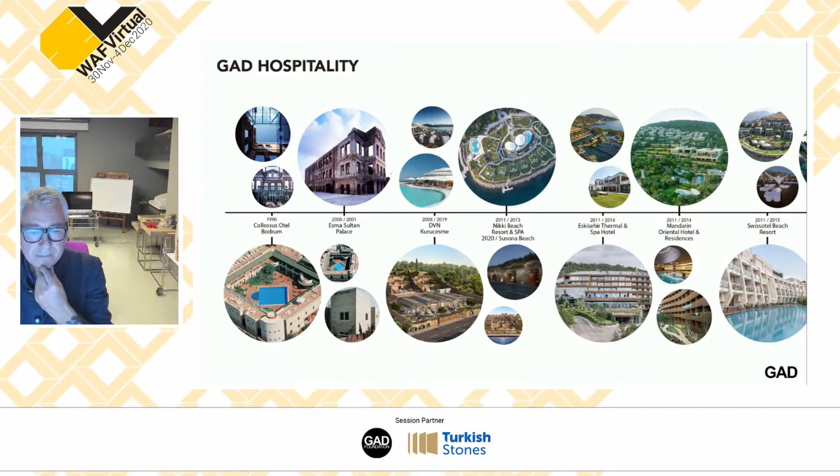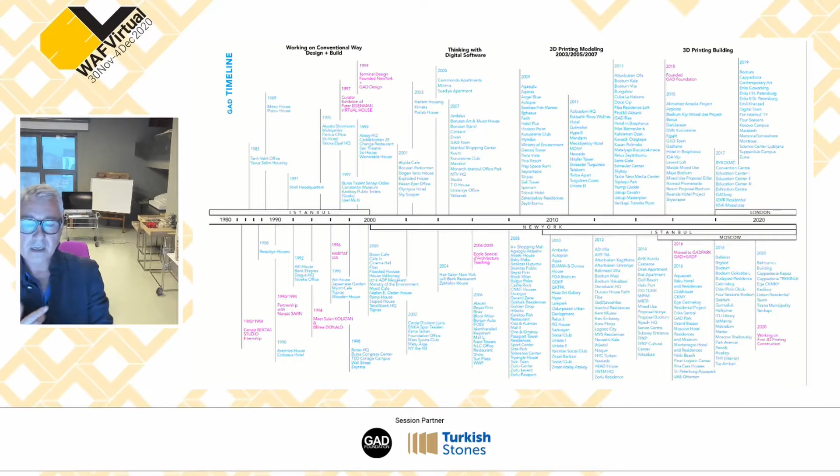I also like to work on architecture with stone, because stone is this fantastic 12,000-year-old material, and not only material, but also a statement tool for architects. What does that mean? It's a structural statement - you can do something structurally with that material. It's also a technical statement, and an art statement - what we need as architects to do something for our civilization.

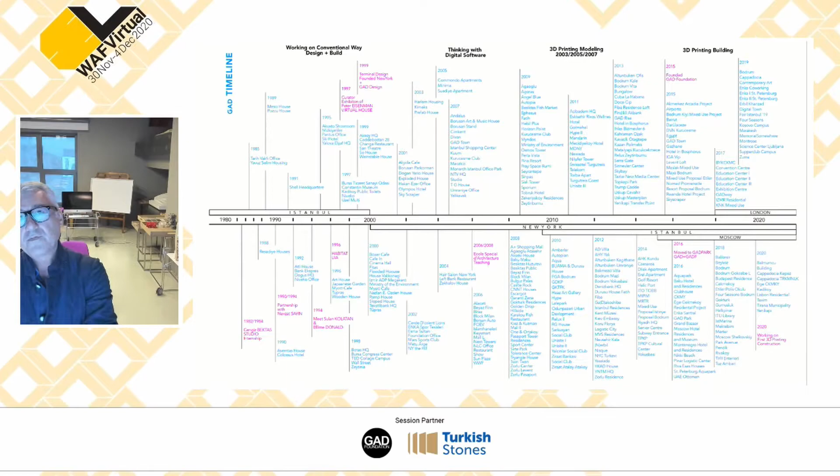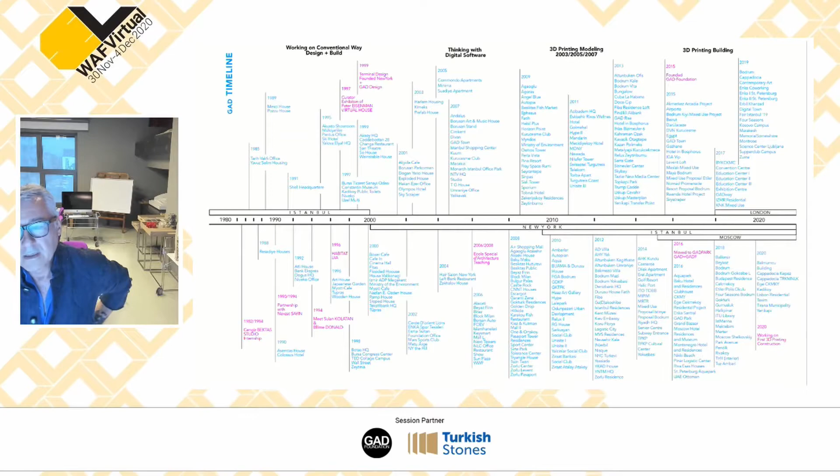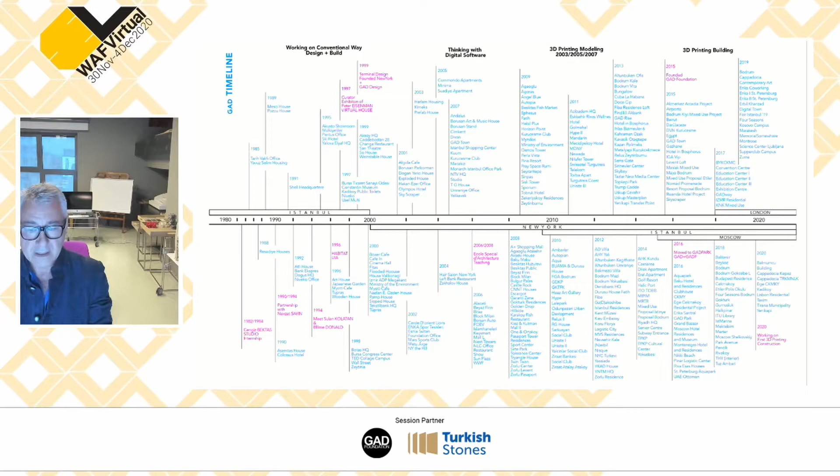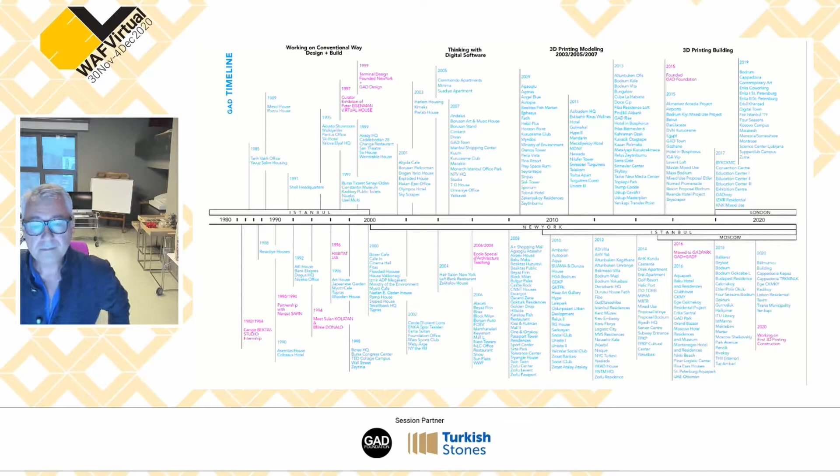I think this started when I was a small child, visiting with my family ancient heritage sites like Ephesus, Miletus, Priene, and Bergama - different kinds of places - and also Cappadocia. These really influenced me, and the desire to do something for people, for our civilization, or also to explain something to myself.

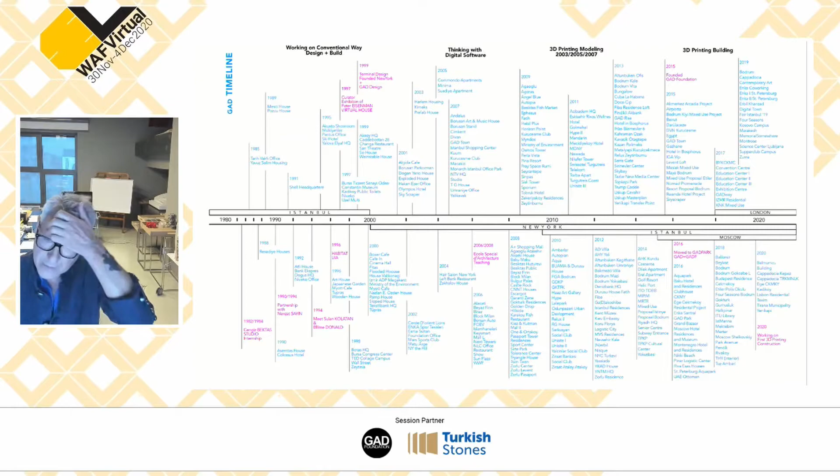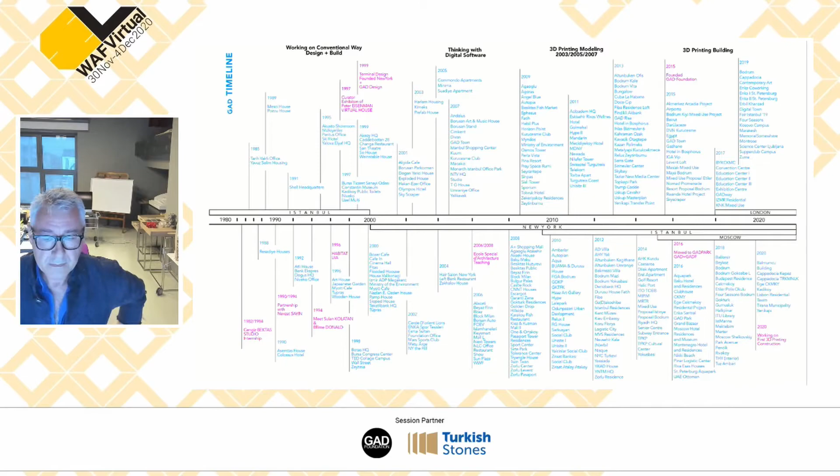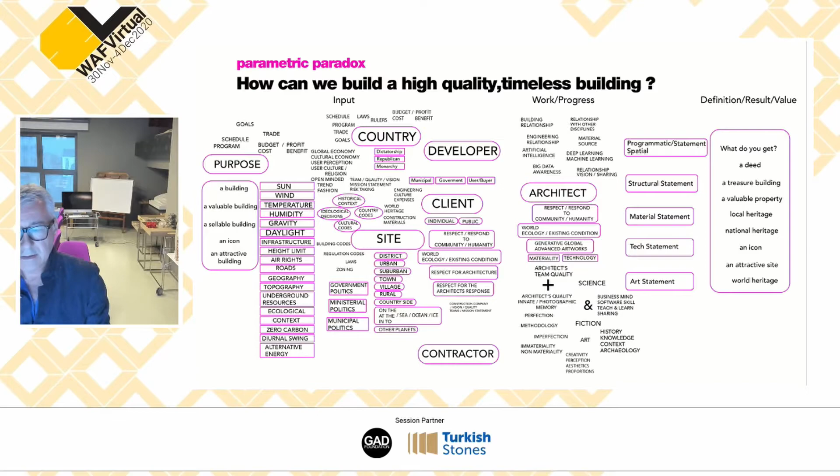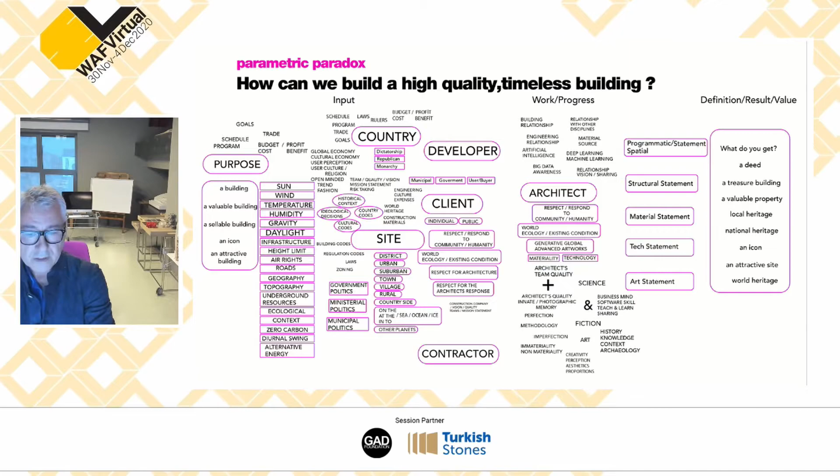So you can see designing something, building something, or adding something onto our planet is a very complicated issue. But in the end, as architects we would like to explain ourselves, our civilization, and our ideas through these kinds of statements. Stone helps you explain your civilization and your ideas to the next generation, because stone is normally 30-million-year-old material, not something produced yesterday or last week by machines - it's totally natural, and that gives you ideas.

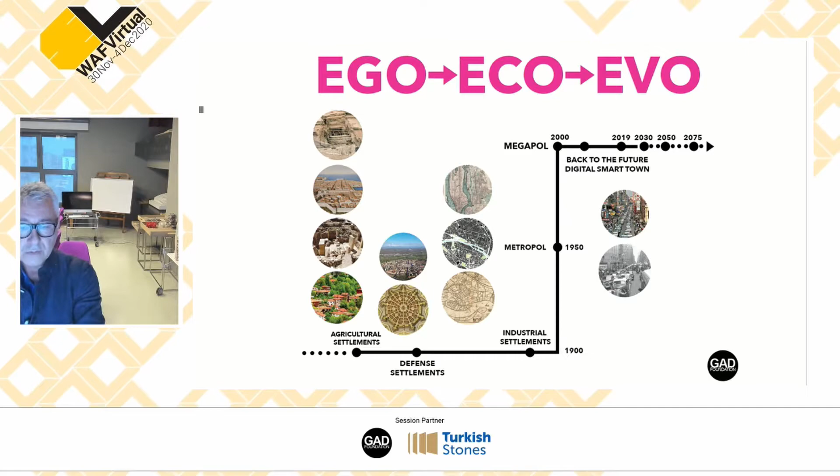Today we are interested in evolution - not just making statements about ego, not ecological things, but we are interested in evolution. I would like to show you some of our projects, what we do and what we did.

We are looking now, in this pandemic time, at what our future cities and dwellings will be.

The first project is in Ortaköy, Istanbul, in the middle of Ortaköy, surrounded by the Bosphorus, our city, and nature.

What we did was create an architecture, making a form and design - not only the building, but also giving back to nature what we add to our planet, as a big garden on top.

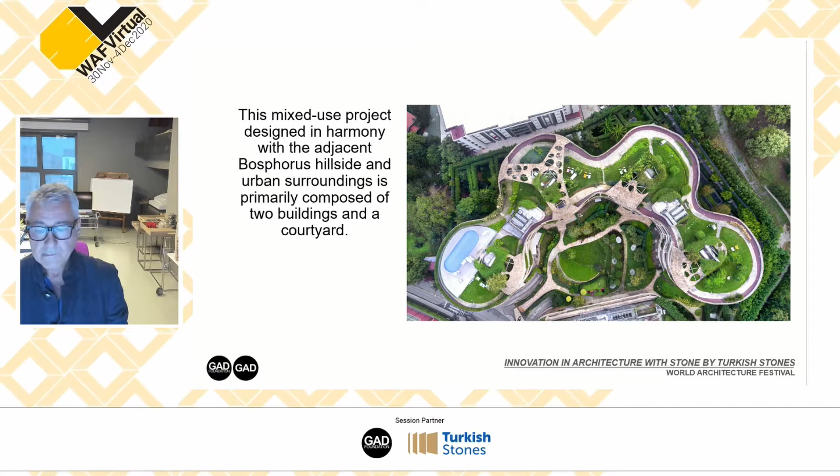We used Turkish stone as the material - Anatolian stone. I prefer Anatolian stone; the name is Ünye.

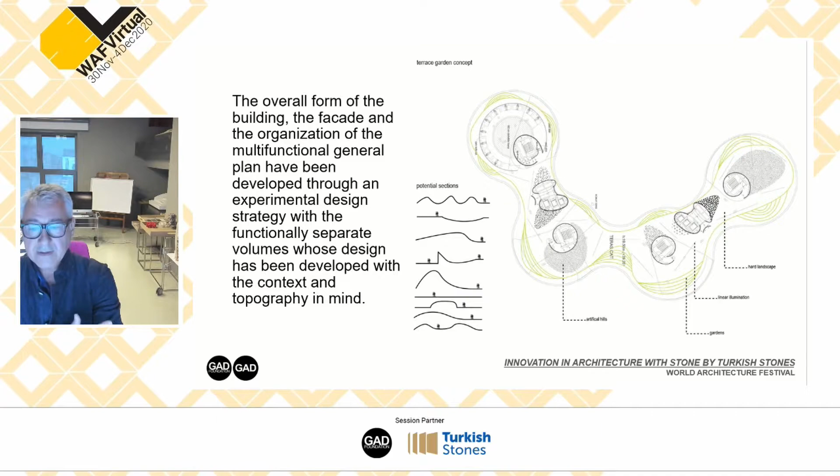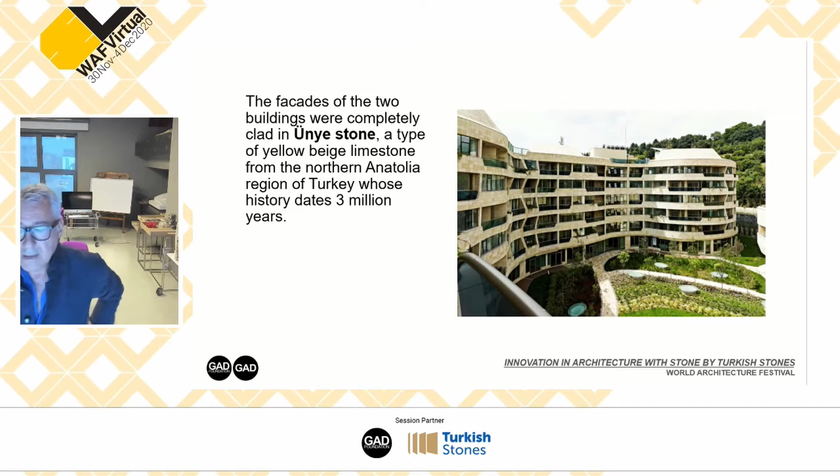You can see we made not only housing projects, but also created an envelope - maybe not only an envelope, but something that gave our architecture not only shape, but also a garden and a 3-million-year-old face.

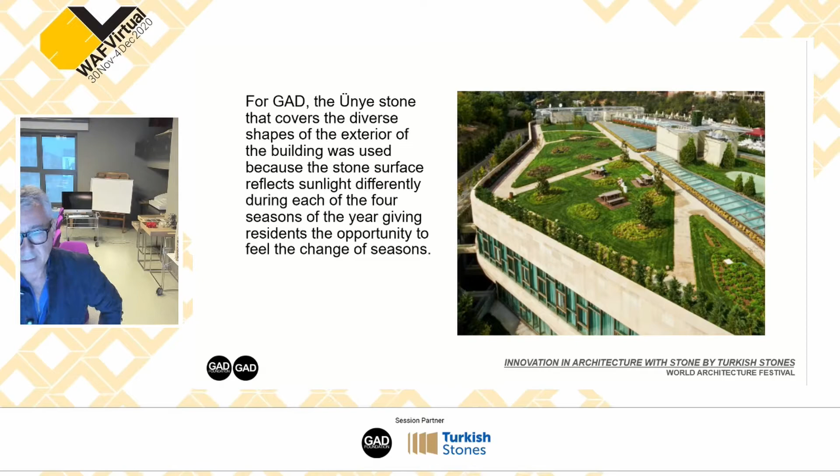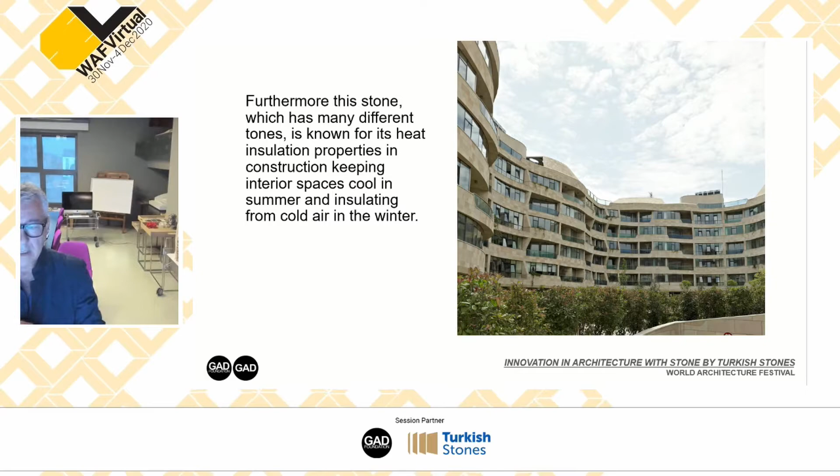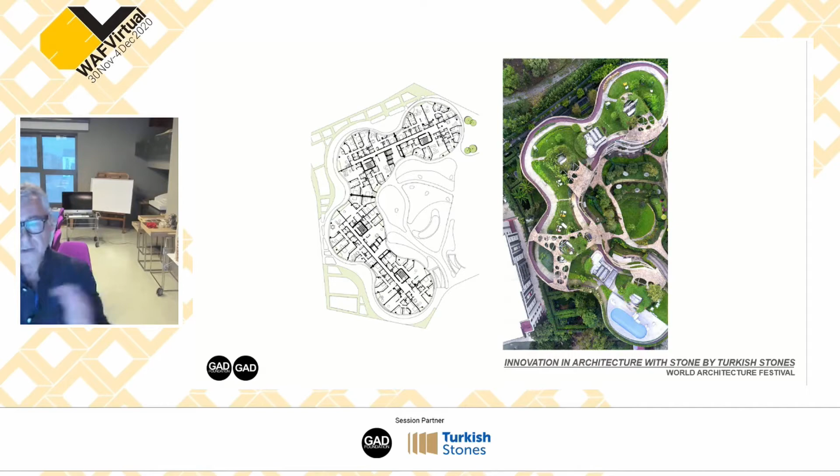We used tools like software for physical and digital modeling. What we tried to do was give more daylight and more daily life, not only to the envelope, but also to the top of the building - sustainable life for our residents.

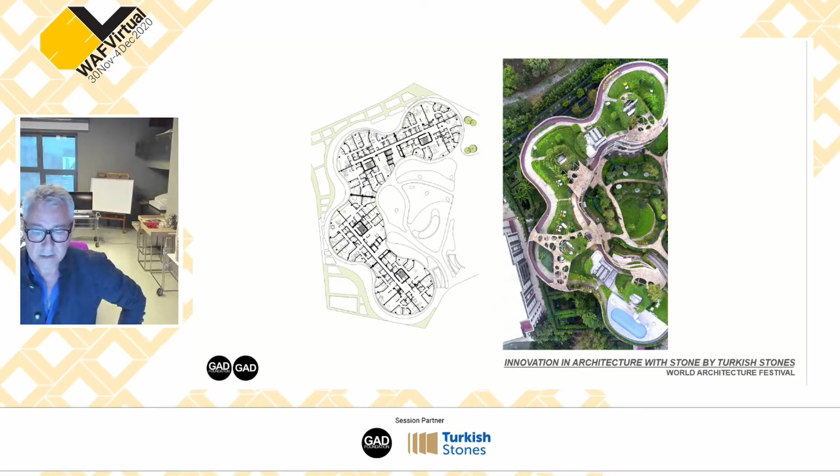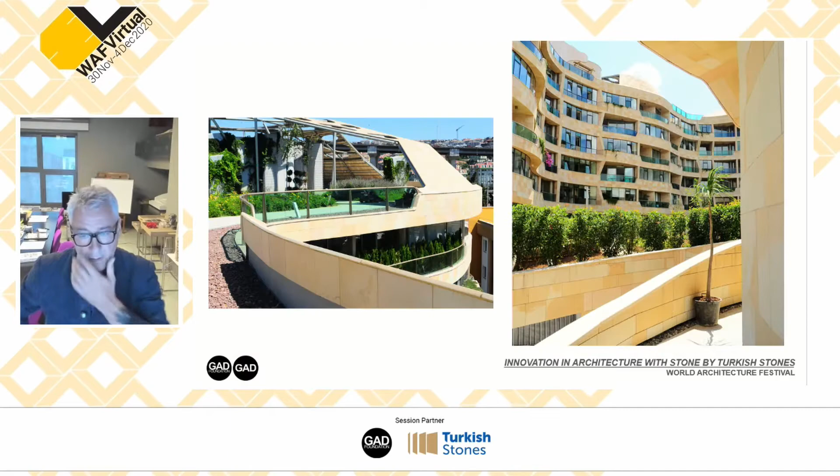Let's move forward to the other projects since time is clicking. There's another project in the Newada, in the same city, Istanbul. The first was on the European side, this other one is not.

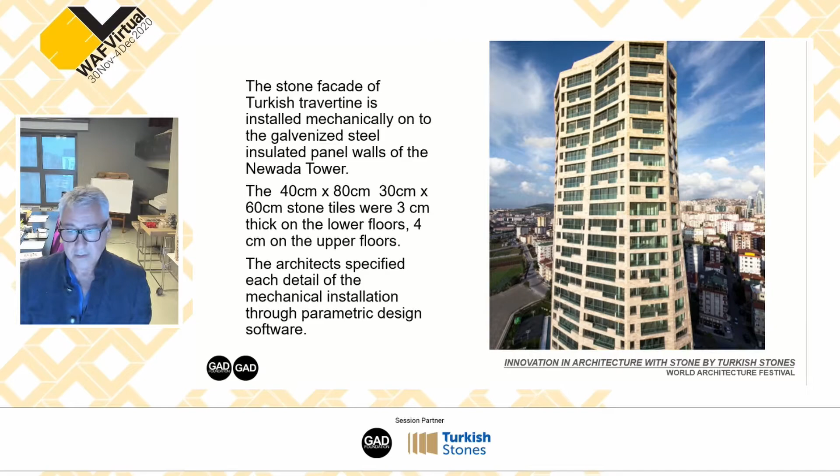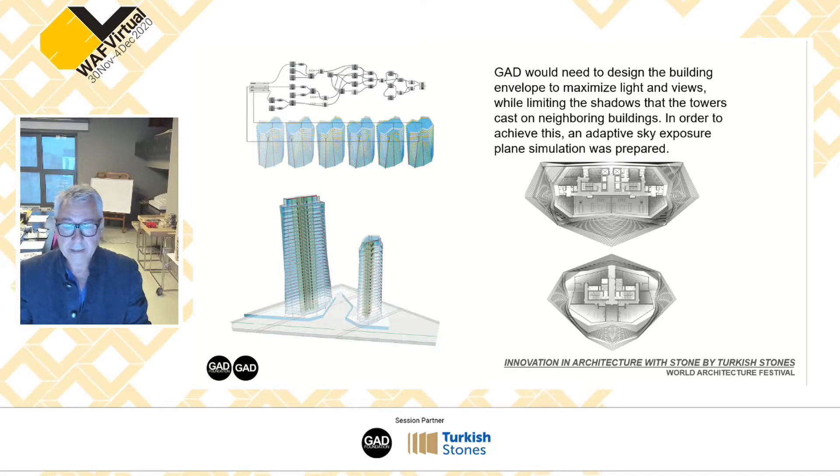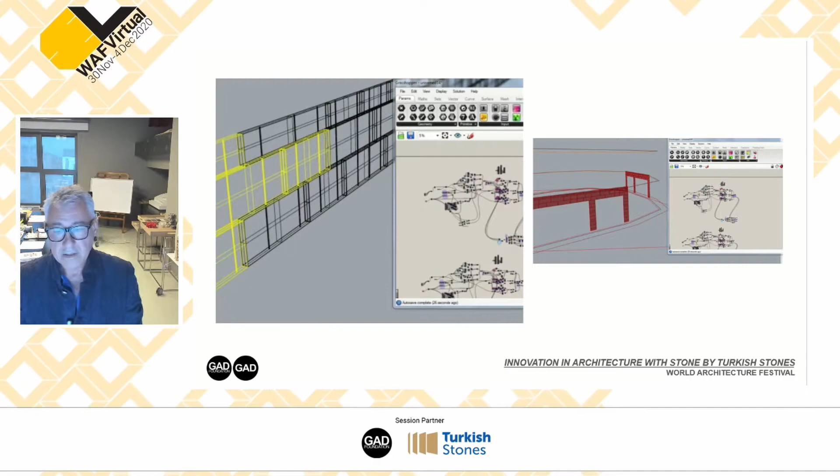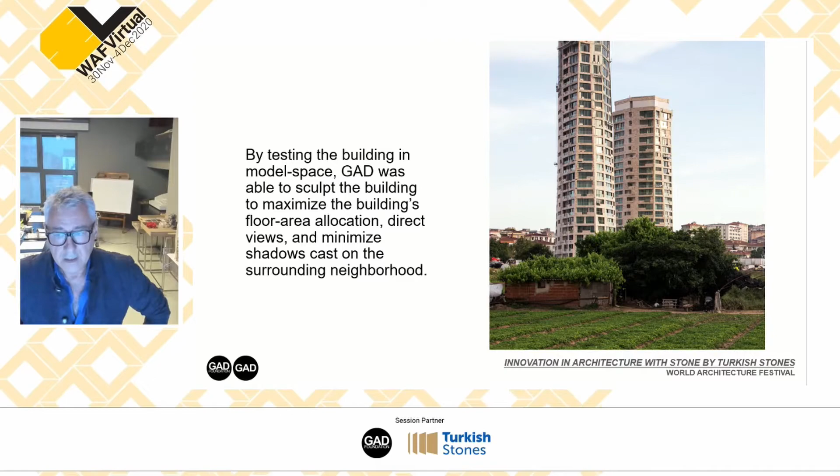It's coming now on the Asian side. You can see a fantastic view, and we tried giving the building a shape, not just making form, creating the inside with more light, more daily light, more view directed to the sea, and then the Prince Islands. You can see the two buildings with different shapes, some details about the facade systems, and more.

We discussed in Istanbul what the weather conditions are. How can we design like New York or Miami? New York is chilly, and it's not easy to create the balcony and outside life. But Miami has the opposite, and Istanbul is in between. Therefore we tried different alternative solutions - the balcony, but protected, not like New York, not like Miami, in between, let's say.

The third project is about Cappadocia. Gökhan, if you can wrap up in the next minute or so. Next, okay, next.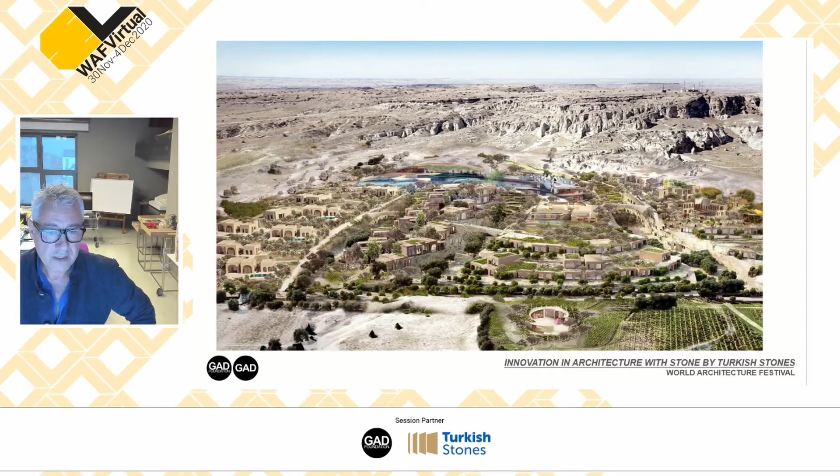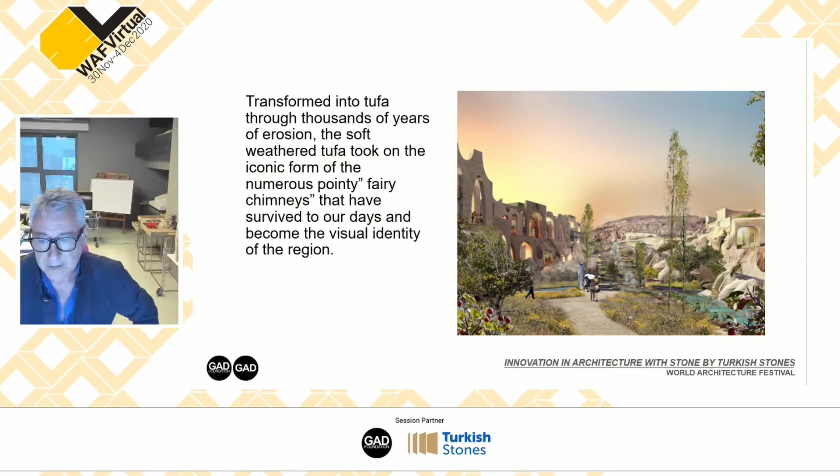Cappadocia is a fantastic place because the existing conditions are fantastic, totally made by stone. You can click to our website and see some details, the amazing historic area, and also the earth is totally made by nature. We try to use the same materials, the nature materials, to design something.

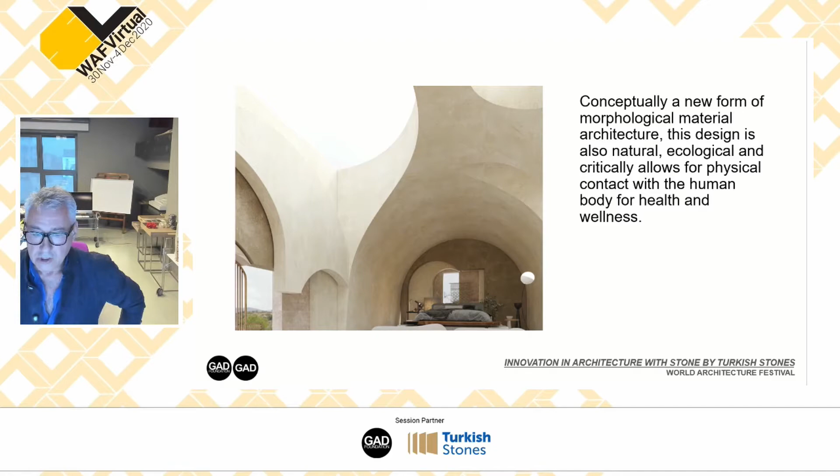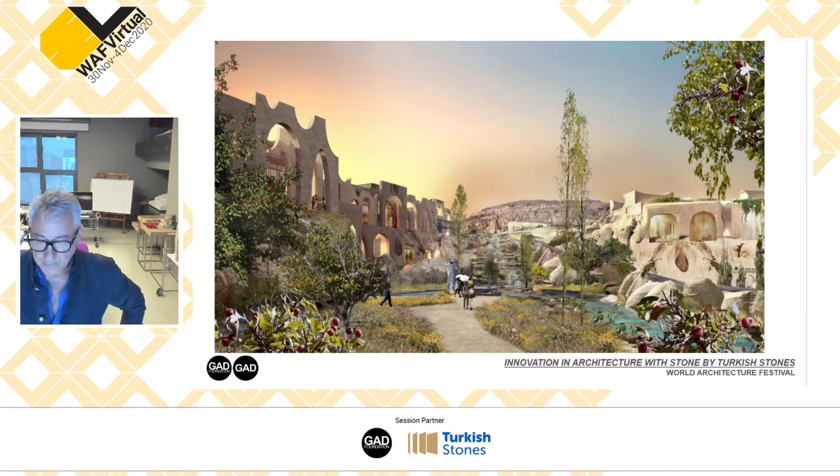So here we can see the Anatolian, wide and deep varieties of natural stone here in Anatolia and Kayseri. We have these volcanic type stones, the basalts, and here the different limestones working together.

Exactly. Okay, I think we can wrap you up, Gökhan, with this last project, and we'll move over to Nizam.

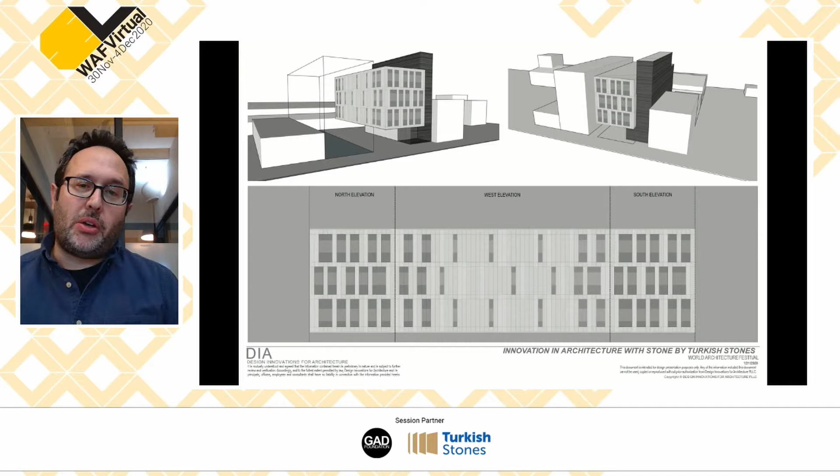So going hand in hand, we looked for this kind of inspiration in nature, this material that we could use on the facade of the building, which is basalt. We were inspired by the basalt columns in nature and how we could use this as a reminiscent of our facade, how it could be more porous to more opaque in this kind of vertical rhythm that we could create. Basalt has also been used in manufacturing, in industry - it relates to this building.

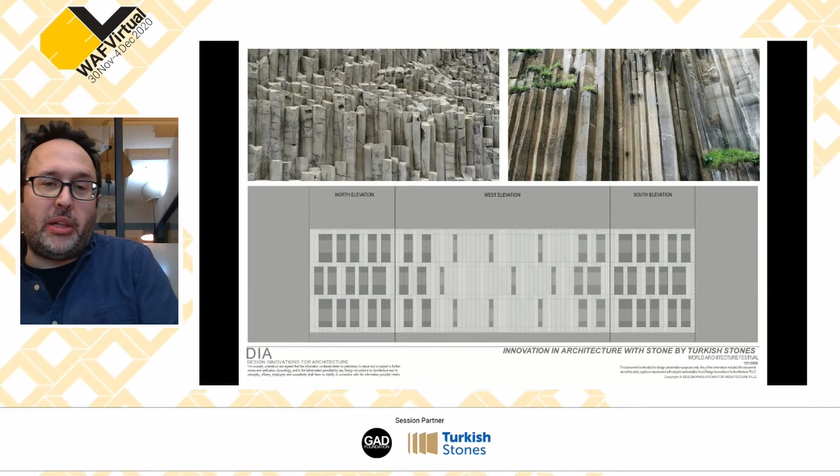We actually looked at basalt and the Diabase and gabbro. These are intrusive igneous rocks, while basalt is extrusive. We ended up using Diabase because of the color we wanted to blend with other colors used in the building, such as highlighting the exterior stair in red color, which goes really well with the Diabase color.

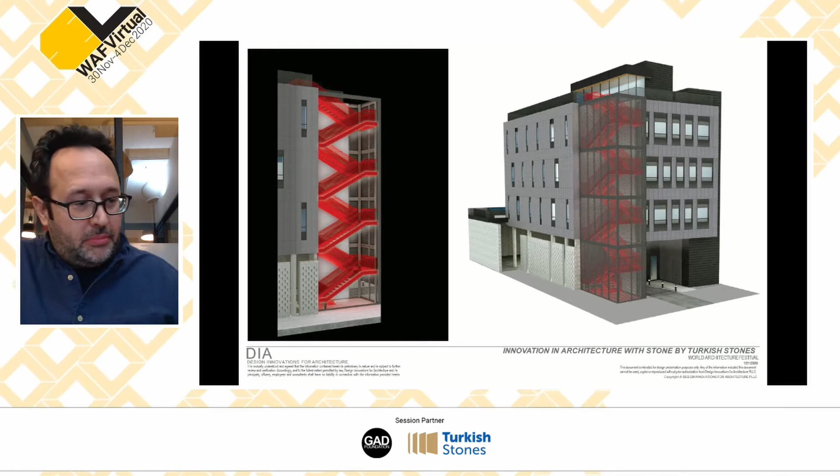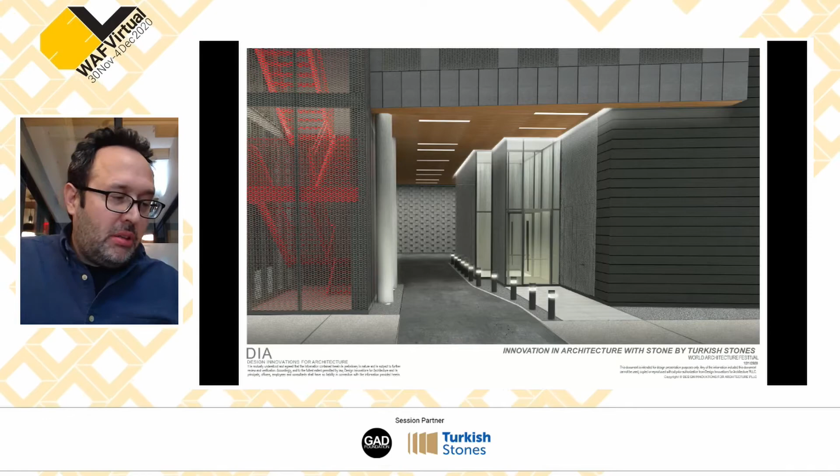But we didn't stop there. We took it inside, where we also introduced color. Again, another feature element is the interior circulation, the heart of the building inside.

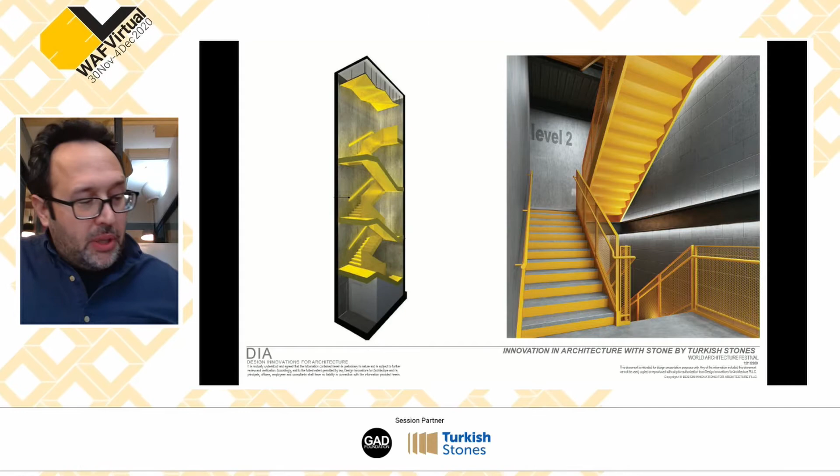And we even got carried away. We were looking at some colored shadows on the CMU blocks of the garage. We made it three-dimensional, and tried to see if we could actually capture the dancing shadows and make them in color.

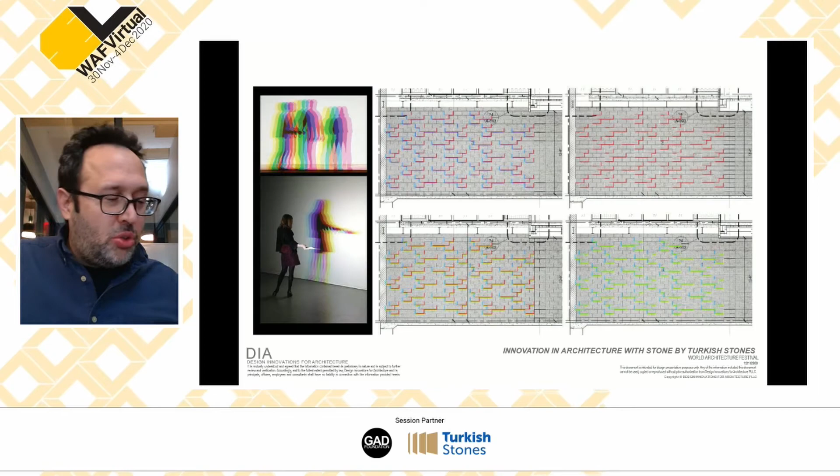Going back to the facade, as I was saying, we were looking for something resilient, and the material itself, basalt, is resilient. But the traditional cladding process, thin veneer stone cladding, is not that resilient. Stone has enormous compressive strength, but it is very brittle, especially against wind loads, earthquake, or other blast-related forces.

It's very fragile, and to combat this fragility, the bad thing we do is increase the thickness of natural stone. I always believe that's actually an irresponsible way of using stone, as it is not a renewable material. At some point, we will consume all the stone on Earth.

So how do we use stone more responsibly? I always like the approach where you use the material in its most minimal amount. So we went with an ultra-thin dia base, 5 millimeters thick, bonded to a honeycomb backing, reinforced by that honeycomb. That allowed us to create a very light stone cladding facade.

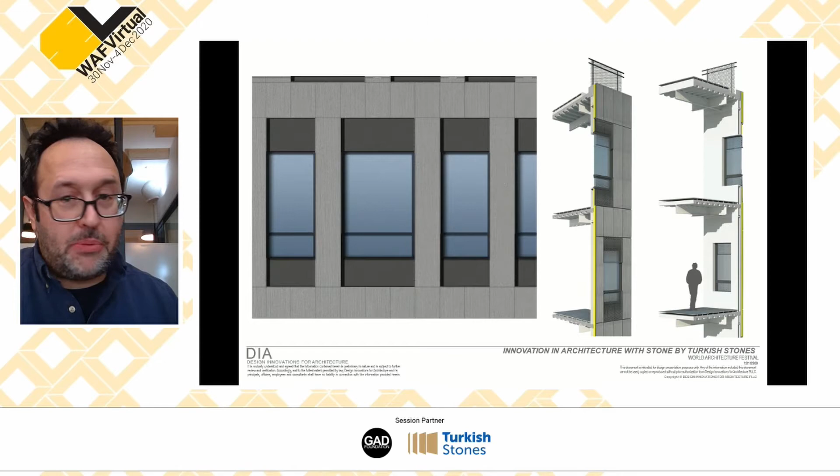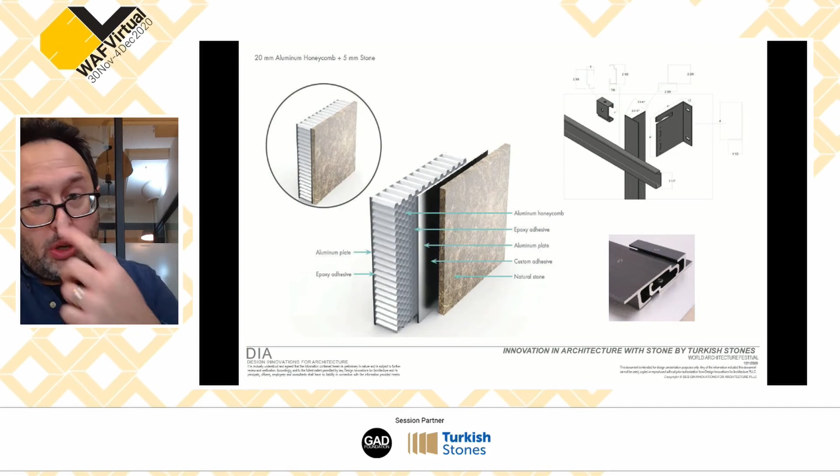It also created a larger cavity where we could have adequate insulation, rather than having it behind the substrate. So the assembly is: an ultra-thin stone layer adhered to an aluminum plate, bonded to honeycomb, and at the back another aluminum plate. This is hung by clips onto horizontal struts, and the vertical strut is connected to brackets, which are connected to the metal stud wall.

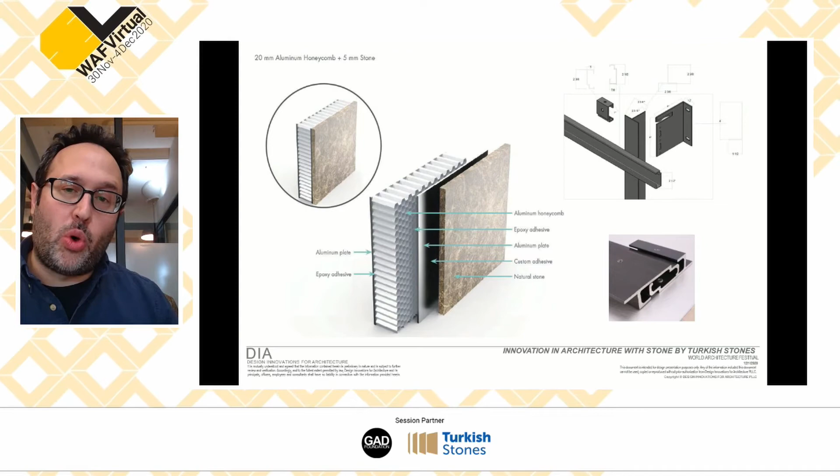This is a very light system compared to the traditional use of thin veneer stone. Usually you need 3 centimeter, or 1 3/16 inch, stone with robust steel brackets anchored to a masonry CMU wall or very heavy duty steel substrate. In this case, we were able to put the light stone panels directly onto the metal stud wall in our building.

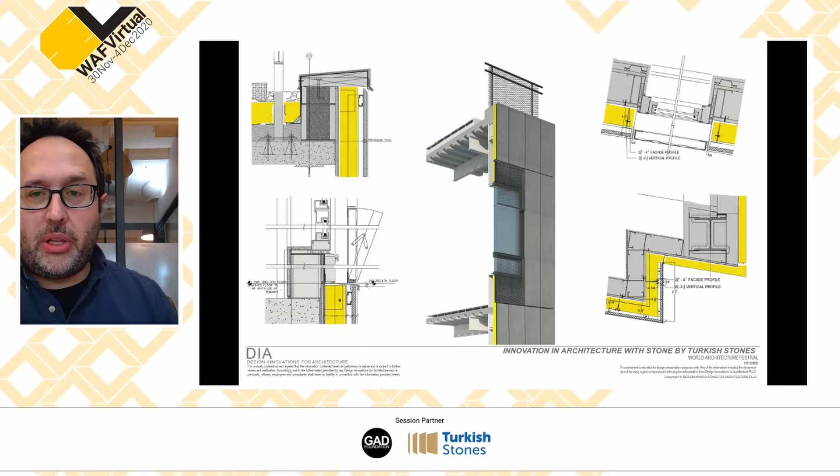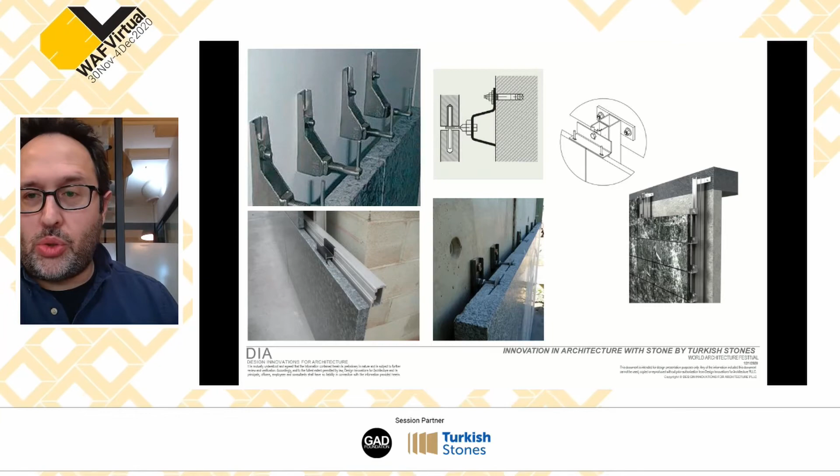Just to show you in comparison, this is the traditional stone cladding, where you use mechanical fastening, and the brackets are anchored either to the CMU wall or to a steel framing system at the back.

Usually when you use a conventional system, it's always safer to go with granite kind of materials. Marble or travertine is suitable only for climates with less heat differentiation seasonally or throughout the day, so it's kind of constraining. You almost always end up using granite for the facades.

But if you use it as an ultra-thin veneer with honeycomb backing, you can go back to using travertine. You can go back to using marbles that you were not able to use before.

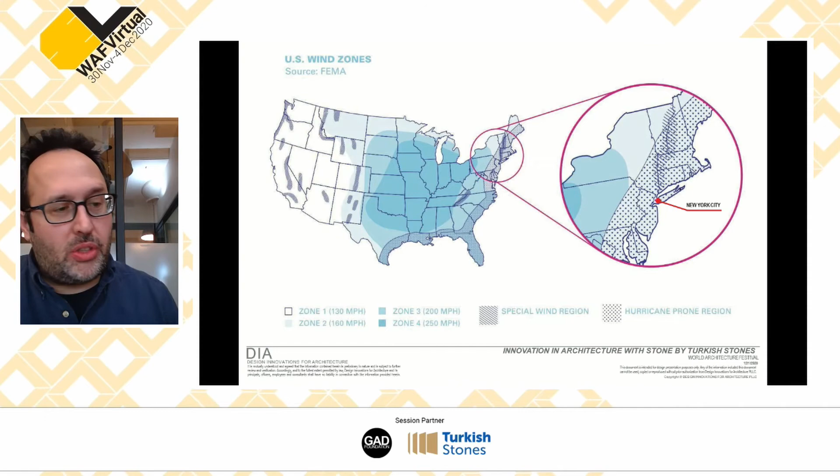The other issue, as I started saying, is wind. The earth is rougher than 10 years ago, especially in New York City. We're realizing that buildings have to be much more resilient, especially against wind-related forces. If you look at Manhattan and the other boroughs, wind is always an issue.

You said we got 2 minutes.

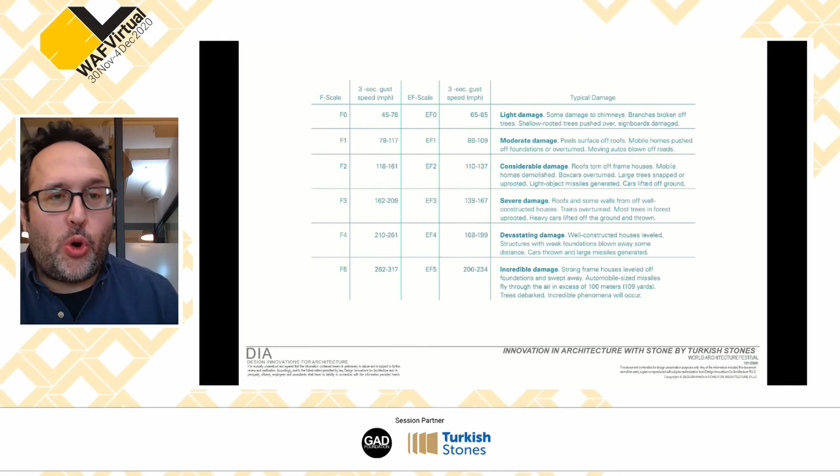And what if it's actually something more than a Category 2 tornado? Well, it's a hurricane. When we had Sandy, which made landfall within the vicinity of New York City as a Category 1 hurricane, it caused enormous damage. So it shows that buildings and the components of buildings need to be ready for this.

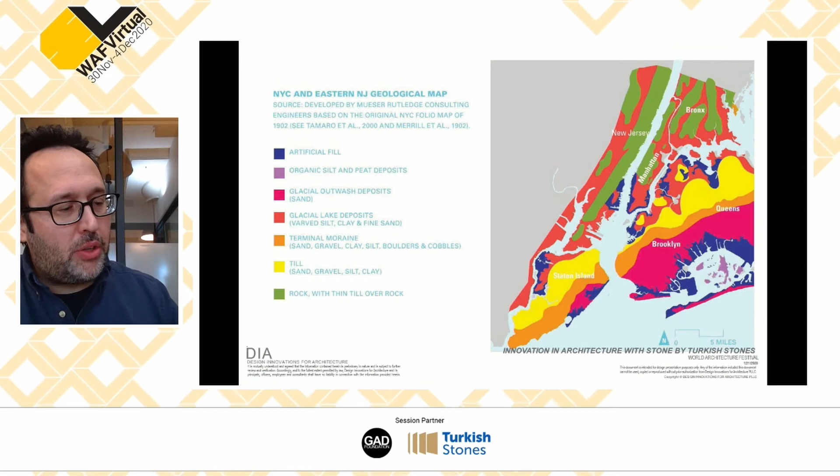That's why I keep coming back to this, why it was the right decision for us to use honeycomb-backed ultra-thin veneer stone. I think it's much more resilient, up to 60 times stronger than conventional thin veneer stone, and you can increase the variety of stones you use while keeping them at a minimal amount.

This is something also important for earthquake loads. Even in New York, there's small to moderate earthquakes, and it looks like it's going to be increasing. And for that...

Tony? Go ahead, Nizam. Go ahead, Nizam. Yeah, sorry, I heard something.

The more important thing about the use of ultra thin veneer stone is you could actually wrap it around structures in a much lighter manner, and you can create depths similar to the ancient buildings. You could actually have overhang soffits.

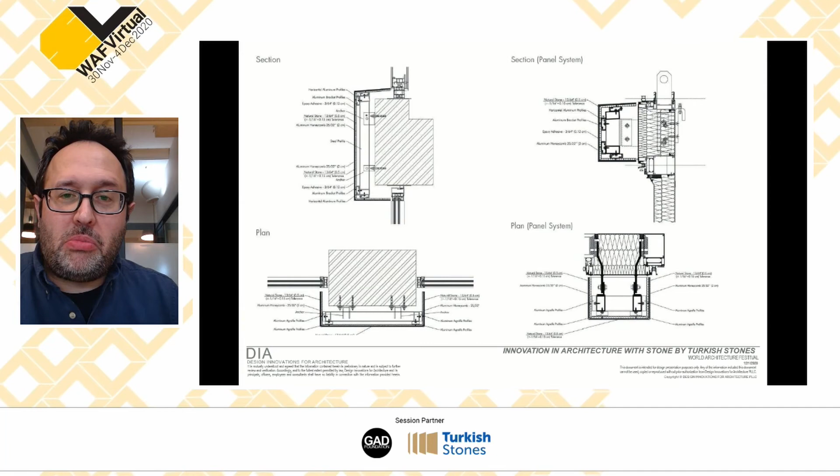That's why in one of our recent projects in New York City, we're studying a facade where we like to use stone, but not as a surface element, rather to create that depth that belonged to the times where stone actually created shadow and brought depth to structures. It's like bringing us back to times where the use of stone was celebrated almost in the masonry sense, while using it in the most minimal amount possible.

Thank you very much. Thank you, Nizam. So we have about 4 minutes left for questions. I'm just going to ask a really quick question here, Nizam.

Nizam, so you use this basalt diabase for your building in New York, in terms of its environmental performance on that facade. Can you speak a little bit about both its insulation properties, but also in terms of how it's resistant to urban pollution and other elements that create degradation, as you correctly pointed out?

Well, the thing about the stone is even though it's in its most uniform condition as a basalt or diabase, these are really dense stones. So you don't really see surface stresses or fractures, but even these stones in time could actually fail due to temperature differentiation. So using a honeycomb backing takes that stress away from the stone. In a way, the stone is actually reinforced, kind of like reinforced concrete, or you can even compare that to fiberglass reinforced concrete.